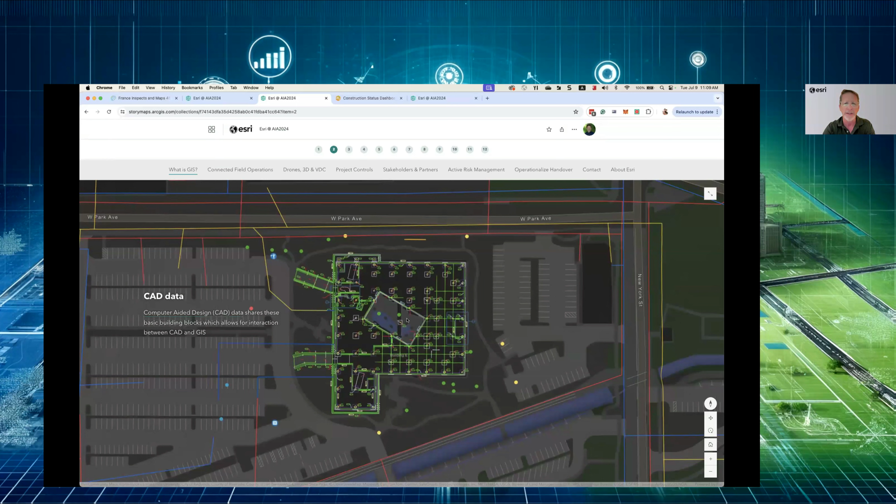This is, I think, where GIS is probably different in a lot of people's minds today than it was even, say, 5 years ago. The intersection of CAD and also BIM data, reality capture information, survey data, all being very easily manipulated and understood in a single environment is bringing GIS into the world of engineering and construction much more so today than it just was a few years ago.

Reality mapping: the idea of understanding your context through satellite imagery, fixed wing, helicopters, drones, even terrestrial scans, and being able to use that data to help provide a deeper set of context over which you might include other layers of imagery, those lines, arcs, and circles and points, or even BIM information.

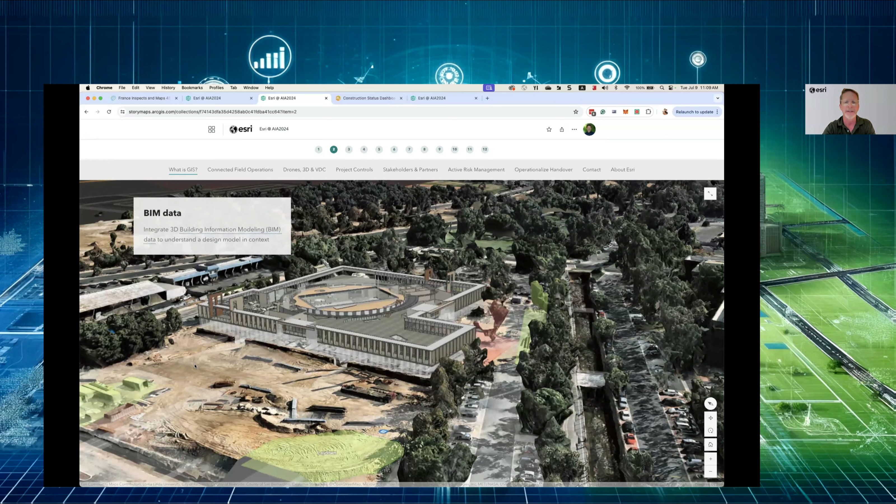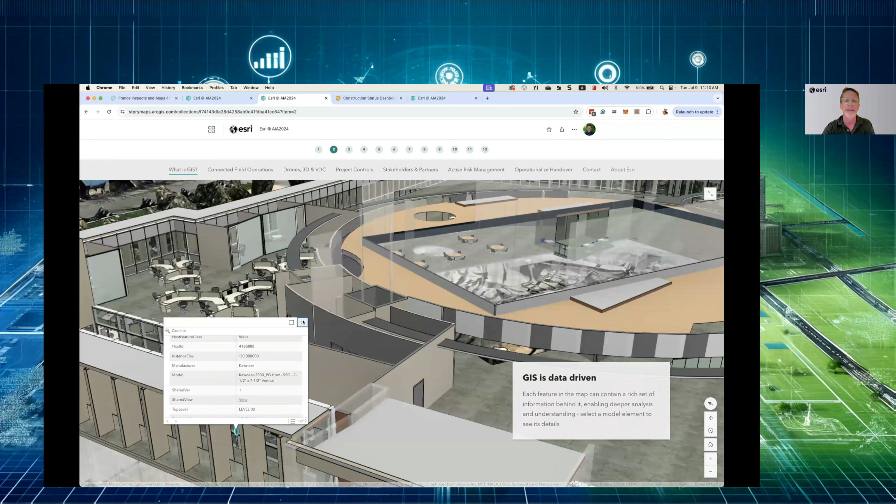In this case, this was a Revit-based model brought into the site, geolocated, and all of these objects that at one point were in a BIM authoring tool, brought into the GIS environment, into ArcGIS Pro, still include all of the properties that you would expect to see in a BIM application. But they're, in this case, available for spatial analysis, for visual analysis, for comparison, for distance, for all types of analytics capabilities that GIS delivers quite uniquely.

Beyond the basics of just bringing together layers of information, GIS is very much a field operations platform as well. And I know we're going to get into more of that through the examples from some of my co-presenters here.

The idea that you would go out with your mobile device, whether it's a laptop computer, an iPad, a phone of various formats, whether it's an Android device or an iOS device, and collect data in the field that represents the conditions of your construction project, the hazards that you have identified, or perhaps asset tracking, asset mapping, or just being able to wayfind yourself to the assets that you have found.

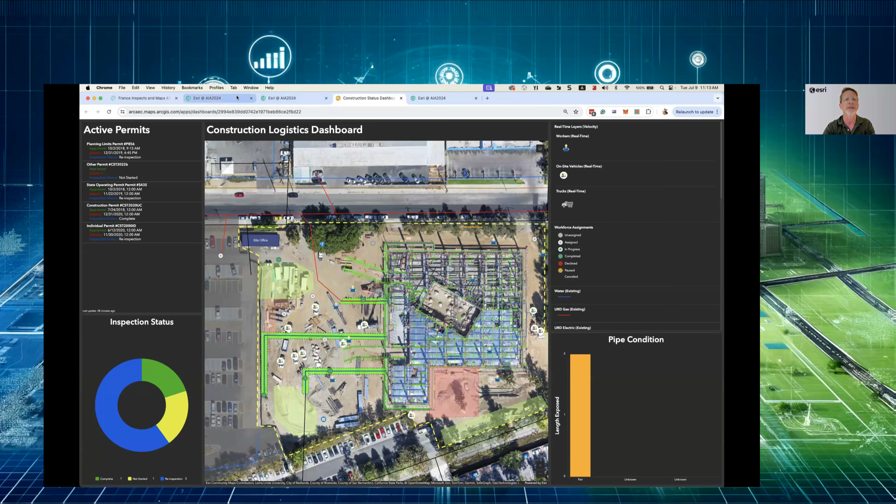As I mentioned, the idea of bringing together your reality mapping, your reality capture information into a singular environment isn't just for visual purposes and isn't just so that context can be understood at a high level. But in the case of our own project, we were doing drone flights on a weekly basis. We now, as the owner of this facility, have access to the historical record. We're able to peel back the layers of the building.

If perhaps we start to see a leak in the northwest corner, we can go back to this digital twin of our construction site, see the data that was collected through drones of any location on that site, and at any particular time, see perhaps flashing that wasn't installed correctly, or a roof penetration that wasn't sealed correctly through the library of images that exist on this particular construction site.

We also have integrations between the location intelligent GIS capabilities, the CAD, BIM, and reality capture information, and schedule data, all in this case combined actually with a game engine to provide a level of visual fidelity, visual quality that really anyone could understand. So sort of gone are the days of needing to be able to understand a stack of 2D drawings and convert the complexity of multiple 2D drawings, but instead having 3D models that are very easily depicted, that are linked back to data, that are linked to schedules in these real-time game environment situations for construction.

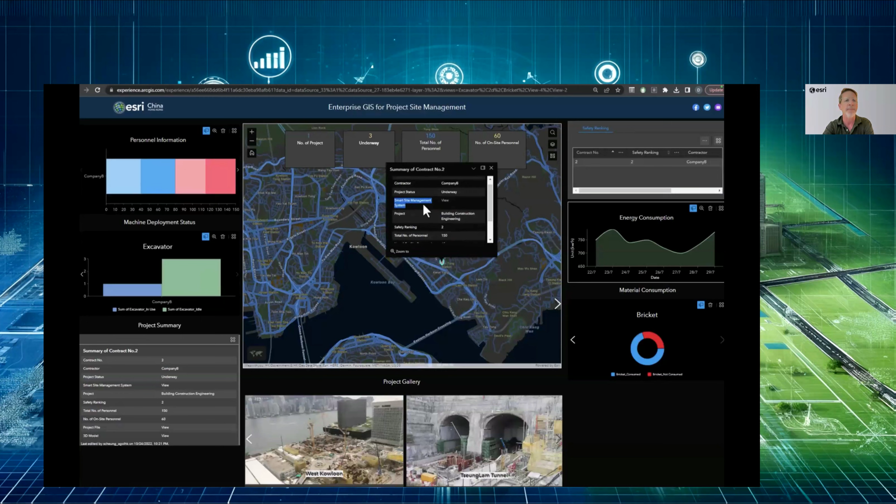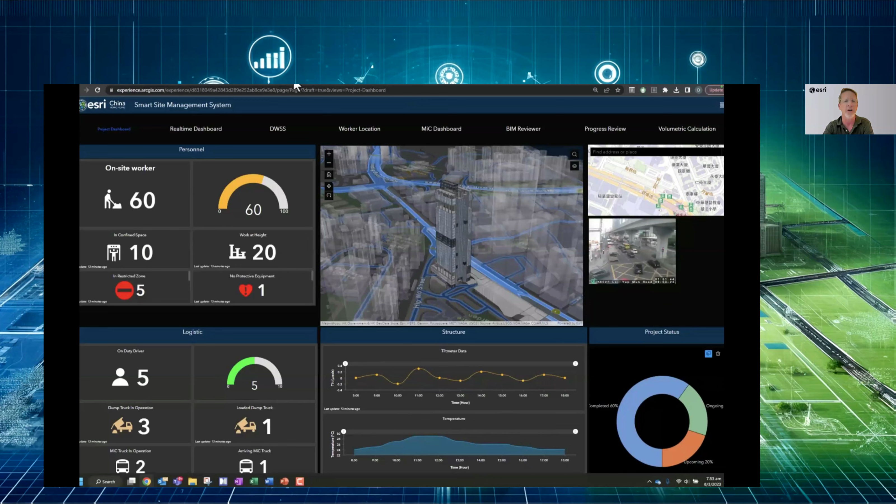Another example that I think is really compelling is from our Esri China office. This is an example in Hong Kong where you can see a combination of map data, personnel information, health and safety information, logistics data, BIM information, camera footage, seismic information, as well as environmental conditions like temperature, air quality, traffic location, all brought together into this construction dashboard.

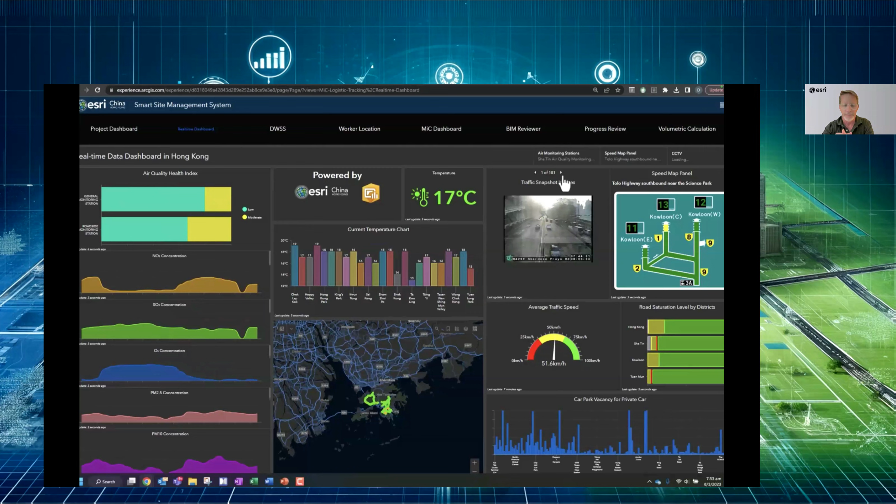And then finally, I think this little example shows how GIS, although many people might think of it as a planning tool early in the AEC workflows, perhaps an engineering application to help understand existing conditions—hopefully I've shown you here its capabilities as a construction solution. But then all of these data sources can easily be packaged up to serve as a digital handover.

Whether you want to call it a digital twin or digital project delivery, these features, this CAD information, these various layers of imagery generated from various heights and at various timeframes all become available to the owner. And I've shown you an example using Esri as the owner, and we're going to see some other great examples coming up.

It's really a complete lifecycle management solution from the earliest stages of planning into design, into construction, over to operations, long-term maintenance, and even the decommissioning of projects—many examples using GIS as a foundation for this entire project lifecycle management. So with that, I might cut myself a little bit short here.

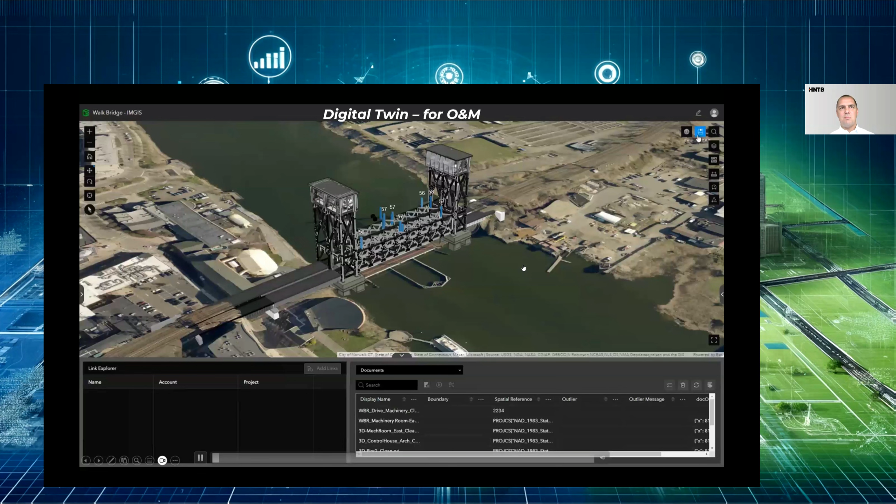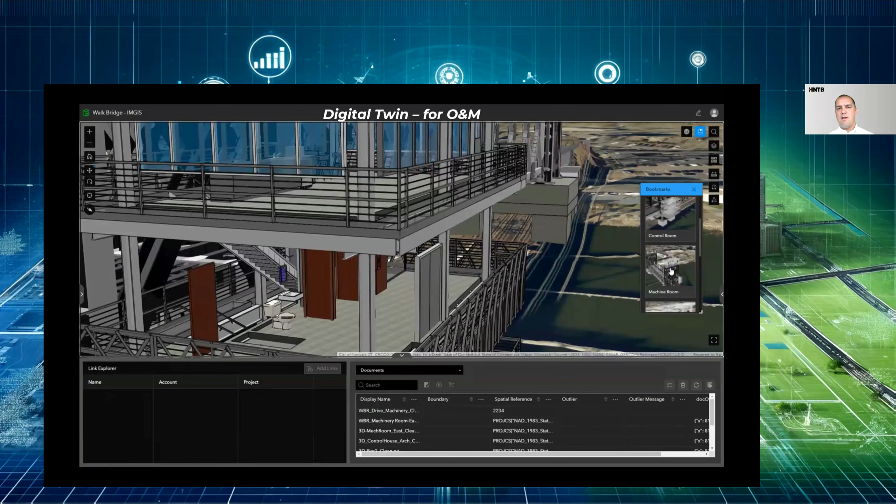Off the top here, I wanted to share with you just a couple of examples of maybe the more exciting 3D type applications of different GIS and 3D CAD BIM things that we've done. This is an example of a 3D modeled bridge. It's actually showing in GeoBIM, like Marc mentioned, and it actually incorporates 3D CAD data from both Bentley as well as AutoCAD sources, gets pulled together into an Esri solution.

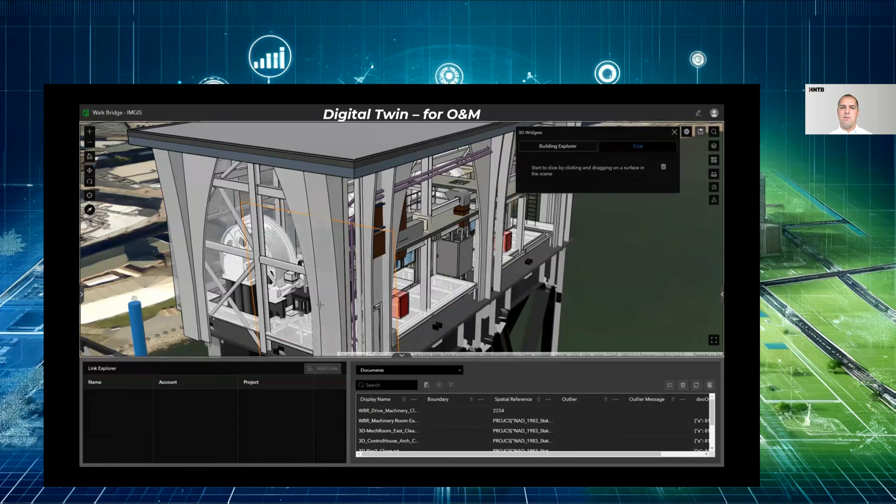It has really helped support the team's monitoring of an existing bridge while another bridge has been built on the side of it. So you can see some of the asset management aspects here of being able to see manuals and cut cross sections into the design. It really brings a lot more visibility into some of the 3D design there. And then the team has also used that to support the construction process. So really it supports a number of different elements there.

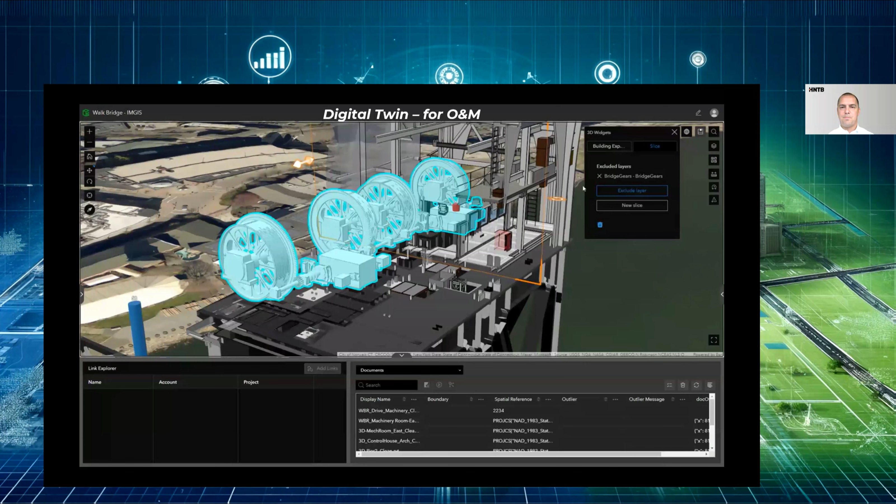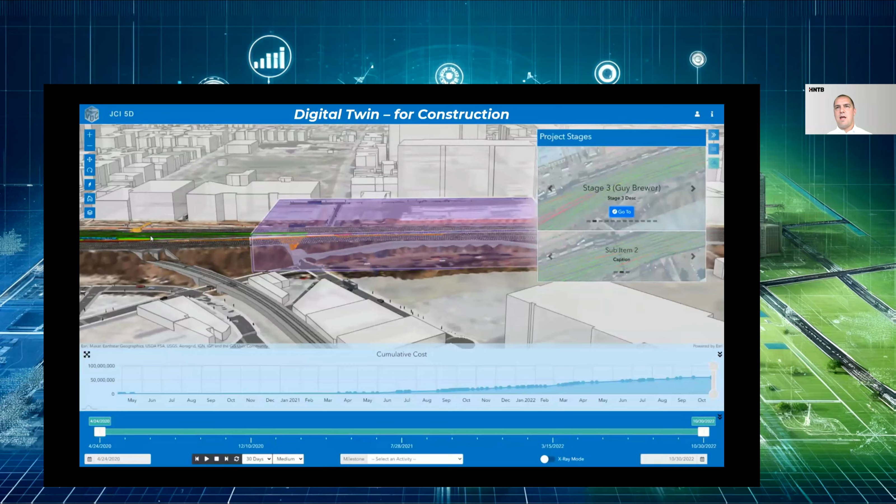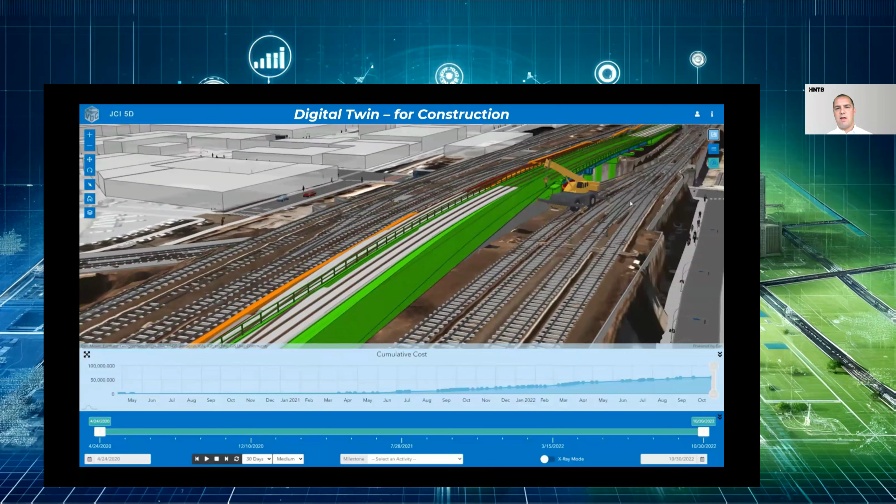Another exciting visualization that our team has used to support different types of transportation work is really to think about construction phasing, right? So this example is showing, actually it's a 5D model. So we've got 3 dimensions, and then we've got cost and schedule as well incorporated into this. And what this really helps us to do is visualize what are the constraints that we might encounter as we go through construction, right? So this schedule aspect allows us to use a time slider and show which aspects of the infrastructure are going to be built at certain time periods.

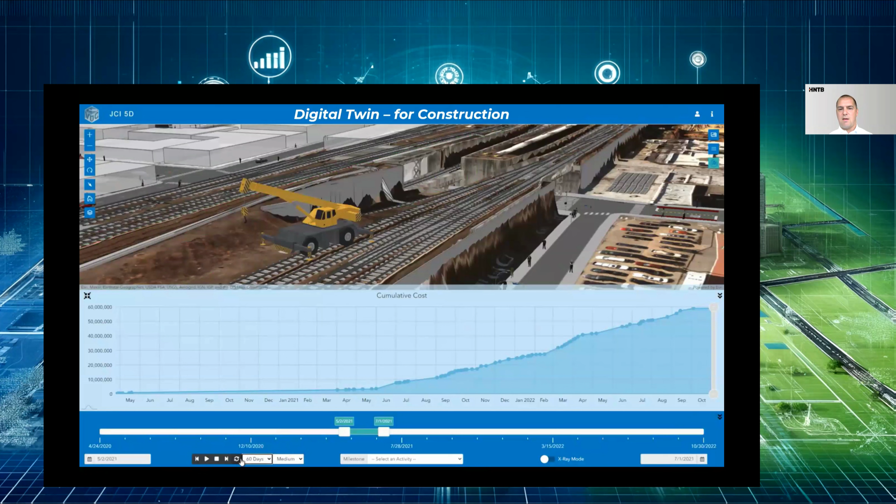And you can also see that cumulative cost curve to help us understand the financial burn and where we should be along the way. So again, this is a really exciting application of GIS and 3D, GIS, BIM, CAD data, all of those things coming together for a really exciting solution.

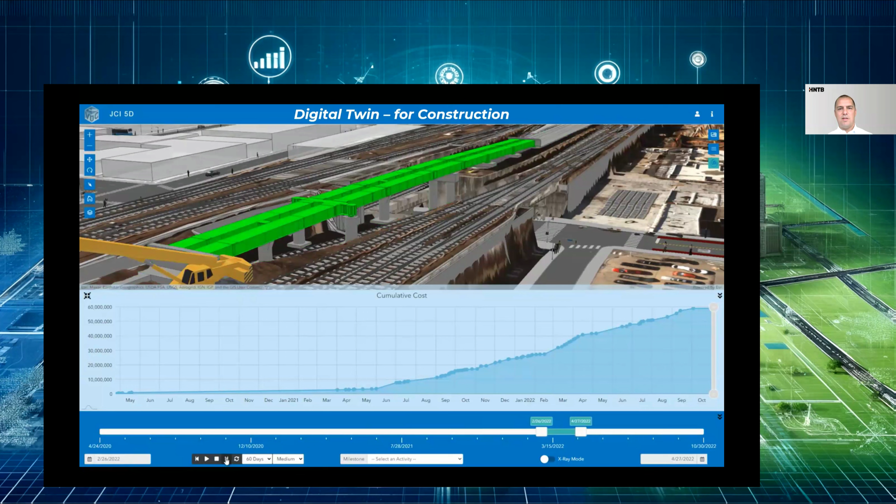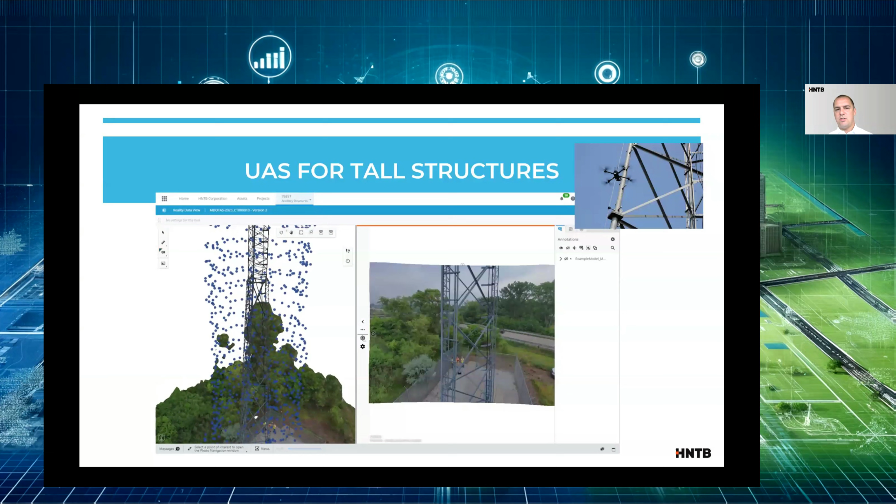And then the next example I'll share is, again, really on the cutting edge of what we're doing here at HNTB using GIS and asset management and infrastructure management. This is an application of using drones or UAV to support the inspection of some very tall structures. In this case, it's a communications tower, and we have an automated Skydio drone that we use to collect the data. You can see the blue dots in the image on the left are the locations where individual JPEG images were taken, and it also shows the 3D mesh model that was rendered after the fact, right?

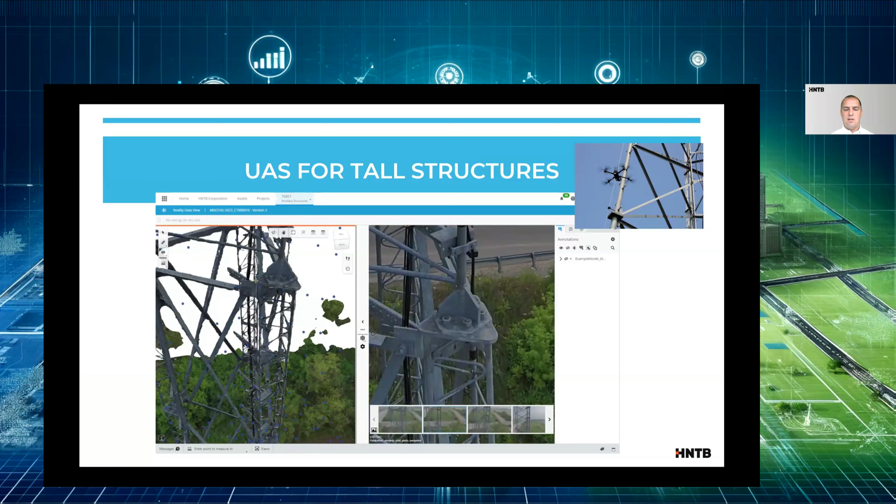So the drone goes around. It collects an immense amount of imagery as well as LiDAR data. And then there's some processing in the background to support a 3D model being created of that asset. And then this viewer allows inspectors to do a visual interactive inspection without climbing the tower, right? So we use this as an early warning or as a way to get that first pass to see if there's any specific areas of concern, and then we follow it up with a tower climber or something like that if there's anything identified of concern.

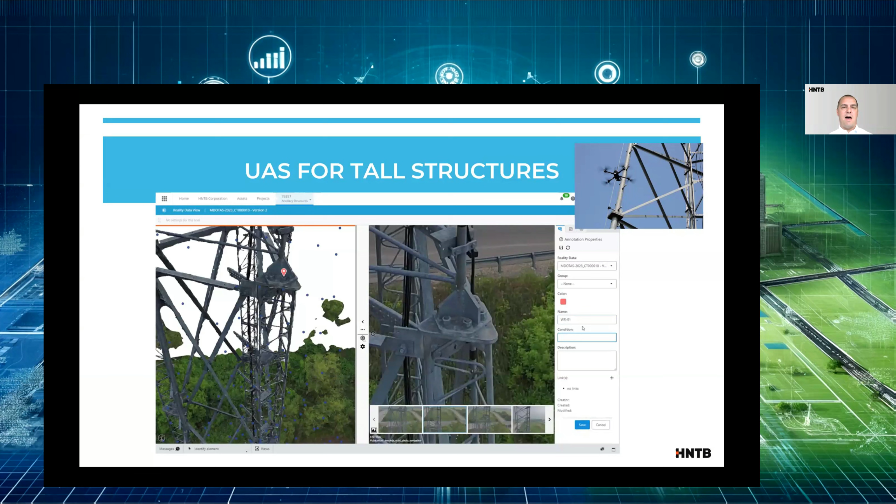So these are some of the really exciting things, really the more flashy things that we can show that we can do and provide a lot of value. And what I really like to focus on the last maybe 10 minutes of my time here is I really want to talk in more practical terms about how we can get started in using GIS as a tool to support asset management of a number of different asset types. So the example that I have here is specifically focused on some ancillary structure assets, but it could be utilized in a number of different transportation assets, such as bridges or other assets.

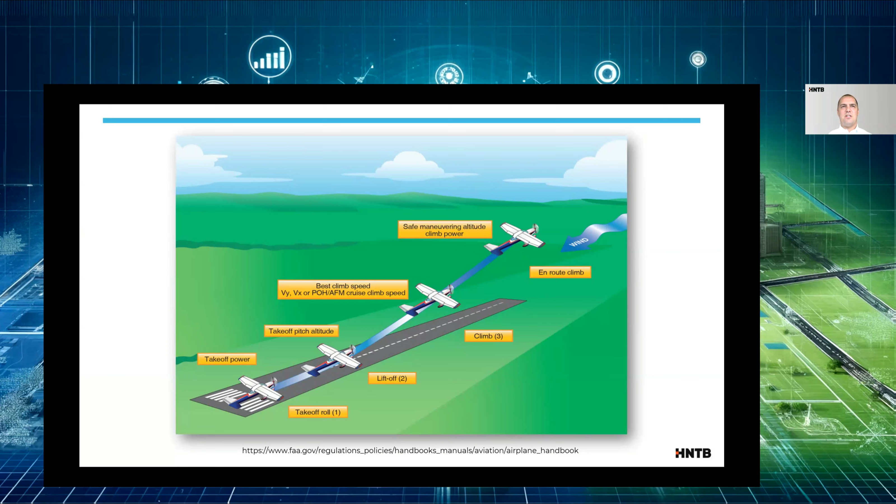So as I mentioned at the beginning of my time here, this presentation is really about getting off the ground, right? Maybe you're just starting your asset management program, and you're thinking about where do you want to go? How do you get started? So I like to use this image example of this plane taking off, right? We know that we want to get up in the air, and we know we have to start on the runway there, right? What's not shown here is all the stuff that happens beforehand, right? So that's some of the things that I'm going to walk through today. Not all of the technology tools, but really how you can get started on building a GIS asset management program. So I'm going to walk through these three different areas of how we got this program started.

Specifically, we first had to plan a route, right? We then had to do that equipment check before we were ready to take off. And then we finally got rolling and kind of had that lift off there.

So looking at this idea of planning the route, the first thing we needed to do was really think about what assets we had, where were they located, and what was the information that we wanted to collect about them. And what we decided to do was a staggered rollout of inspections over the course of a few years of this ancillary structures program in Michigan.

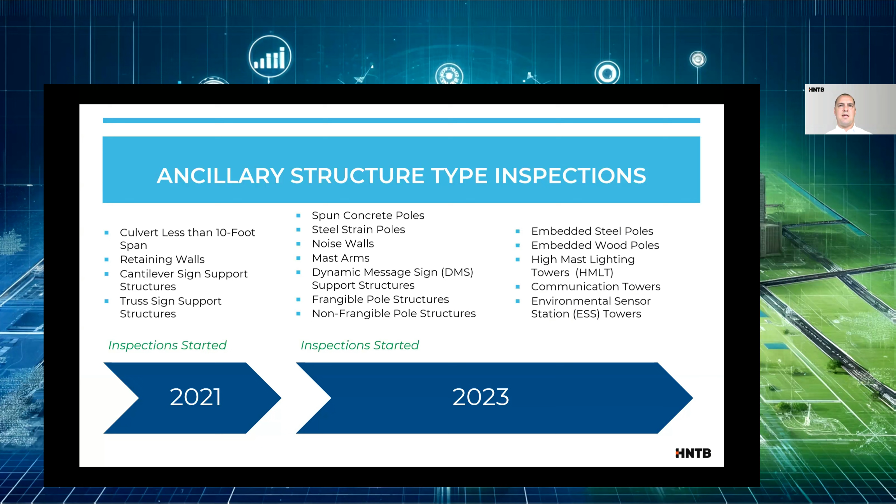So you can see we identified maybe 4 high priority assets that we wanted to start with: the culverts, retaining walls, and the sign support structures. And then we phased in other asset types over the course of a few years.

And again, I know this isn't GIS in particular, but this is really the framework. This is the roadmap that we developed internally as a program that helped us support the decisions we made in standing up a GIS database and getting the inspections in the field.

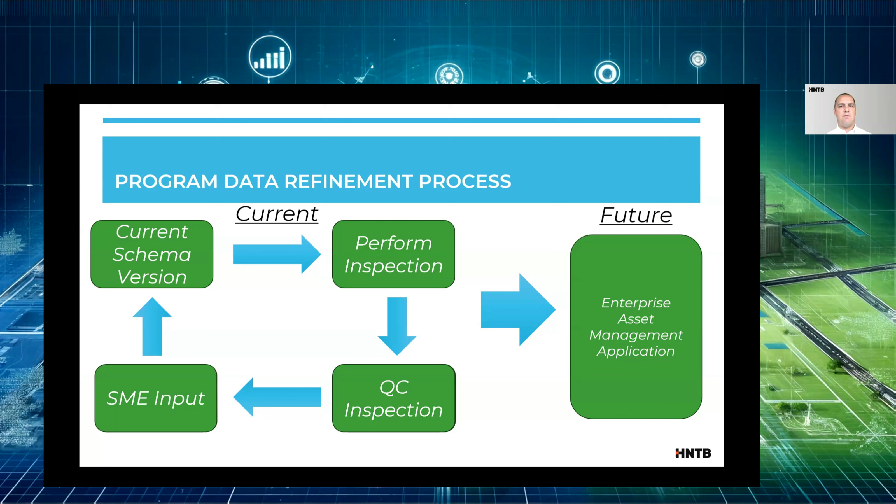One of the important things that we worked on in this program was this flexible framework. We used the Esri database, which gave us a lot of flexibility to develop our own database model and schema. And so through this, we had a lot of iterative changes to the database as we identified what we wanted to collect, and things we thought we wanted to collect that we identified were challenging out in the field. So we went through this refinement process and got feedback from field staff and SMEs. And we know that the client, Michigan, wants to move to an enterprise asset management application and not solely rely on the Esri platform. We know that when we get there, we'll have a really mature data schema.

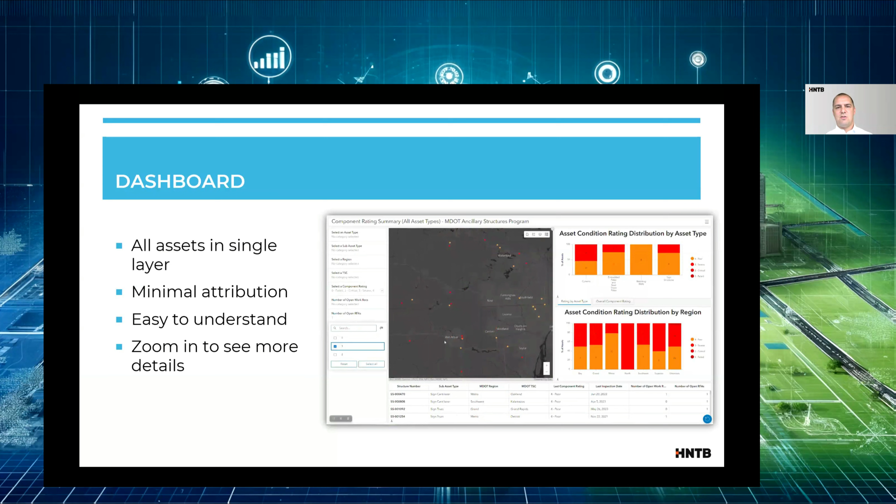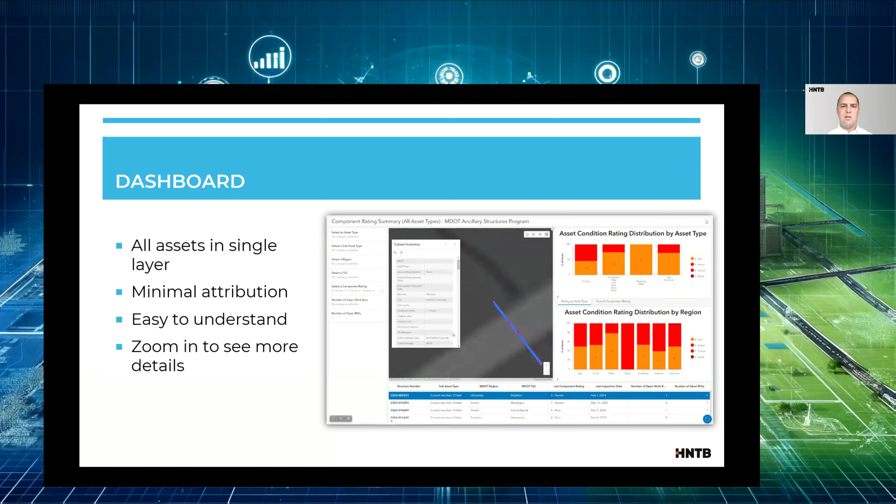I've got just a couple slides here showing some of the different ways that we've been reporting this information out to the different stakeholders. So this is a dashboard that's really more focused on high-level planning or identifying those worst areas of poor conditions, things that can be used to help prioritize maintenance or capital programming. And then we also were able to develop a more in-depth solution that allows teams to really get in and investigate the details of the inspections, including detailed photos and all of the attribution that comes along with it.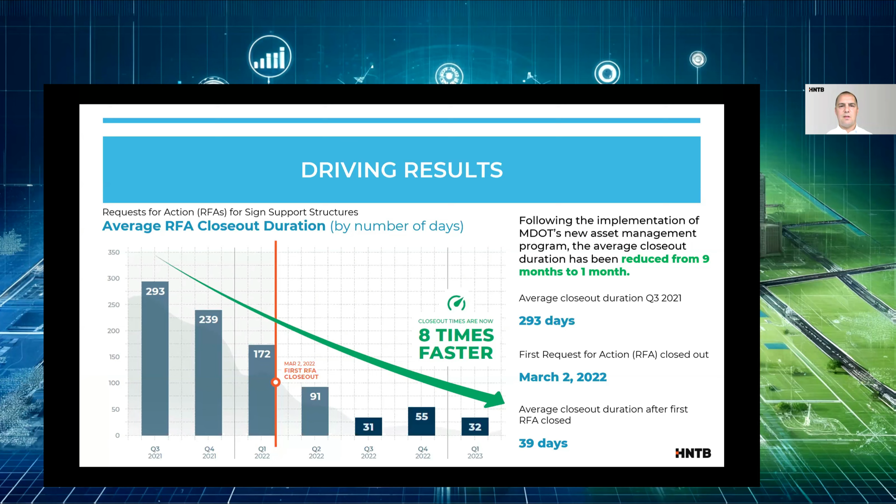All right. And then the last thing I'll share with you as some takeaways here is we were able to get this program going using a COTS, or commercial off-the-shelf, software approach. And here are some of the things that we really found were helpful. This has a familiar approach. We had a lot of people already using some of the Esri apps, so it wasn't a big change for them to jump in and use them for a different asset type. We were able to collect an enormous amount of high quality inspection data without purchasing any new software. We also didn't have any delays due to that procurement or IT process. So we were able to get up and running really, really quickly.

We've maintained full control over the data schema, like what fields we have, and we can change that as needed. We have everything we need, all the apps and things like that. And with that future goal of moving to an enterprise asset management software, we know that we have that mature schema where we're not going to need to make costly updates to a more enterprise customized application.

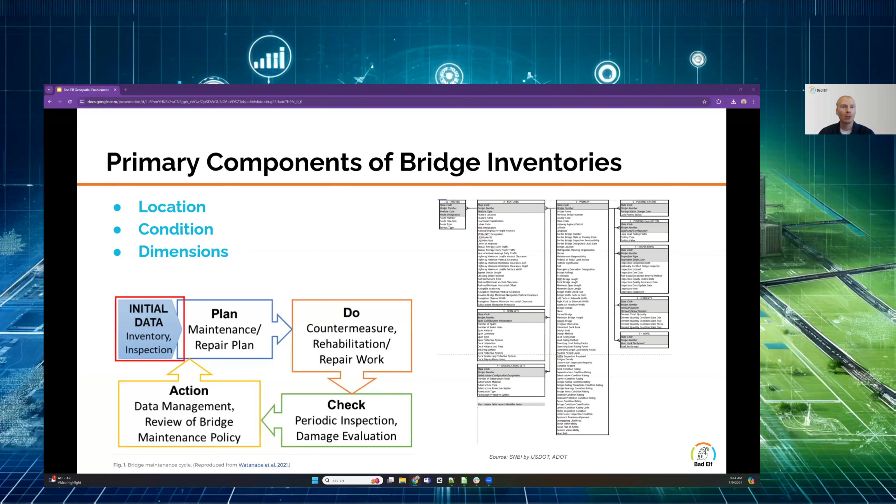All right, so let's go ahead and close that poll and just do a quick review on that, if you wouldn't mind. So it looks like many of you are not implementing a GIS solution for your bridge inspections and maintenance. No surprise here. That's why you're interested in this. So hopefully you learned something today and get inspired to begin that process.

And looks like many of you are actually using a GPS for your data collection. So I'll just cover a quick overview of that, just some of the major considerations when you are starting to integrate GPS into your bridge inspection systems. So the benefits of moving over to digital: data entry is going to be far easier with these digital dynamic forms, especially if you're using an app like ArcGIS Field Maps.

You can do a lot of automation, real-time data checks. You can implement domains and checklists for real-time validation and QA effectively. Out there in the field, you don't have to worry about people making typos, maybe forgetting to fill out a certain aspect of the form. If it's raining, don't have to worry about the paper getting wet, smudged, data entry errors, etc. It just really streamlines the process because you take the whole transfer workflow out of the equation.

You're just implementing straight into the system, and as long as you're connected to the internet, it's syncing straight to the cloud. And actually, in real time, you can have somebody in the office checking and coordinating workflows, making sure everything's looking good, as well as reviewing your own work as soon as you input it. So extremely advantageous, especially when you start implementing GPS and you start having to actually stake out, navigate back to those specific problem areas instead of just having a very generic coordinate of where the bridge is located. You'll have the exact coordinates of those specific locations.

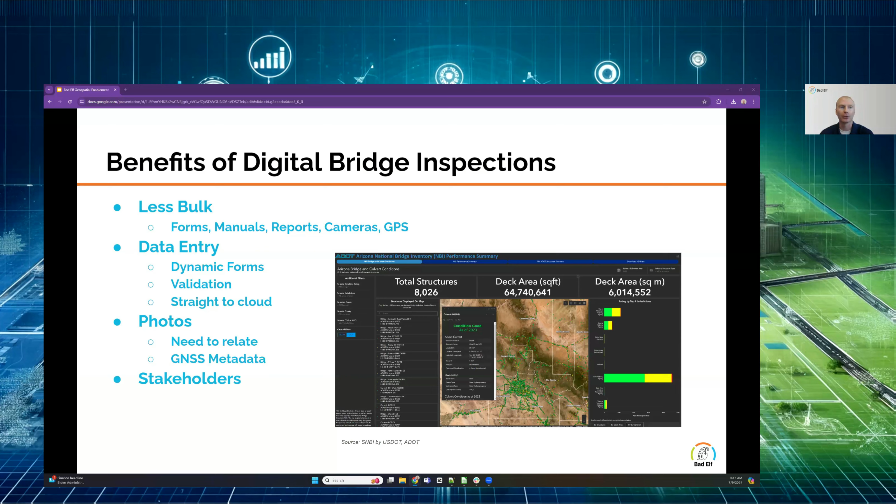So what are the considerations with GPS? GPS has come a long way in the past decade or so. If you're just using your phone or tablet like you would in your car, that's awesome for very general locations. That can definitely help you just track the location of the bridge in general. But when we start wanting to track specific locations of exact defects, we need more accurate solutions. So that's where the very accurate GPS of the modern day come in.

The two major categories would either be survey grade, where you're connected to an RTK system, and you can use these for elevations. Horizontal accuracies are typically 1.5 to 2 times more accurate than vertical. So especially with bridges where orthometric heights are so important, we really want to be as accurate as we can. And you can get 1 centimeter, 2 centimeter accuracy by simply picking up one of these units, connecting to your network, and then connecting to your phone and using an app like Field Maps or whatever your solution of choice is, and start collecting extremely accurate data without being a registered surveyor.

I still recommend only using people that are registered or licensed for whatever application you're doing, but it's more accessible than ever.

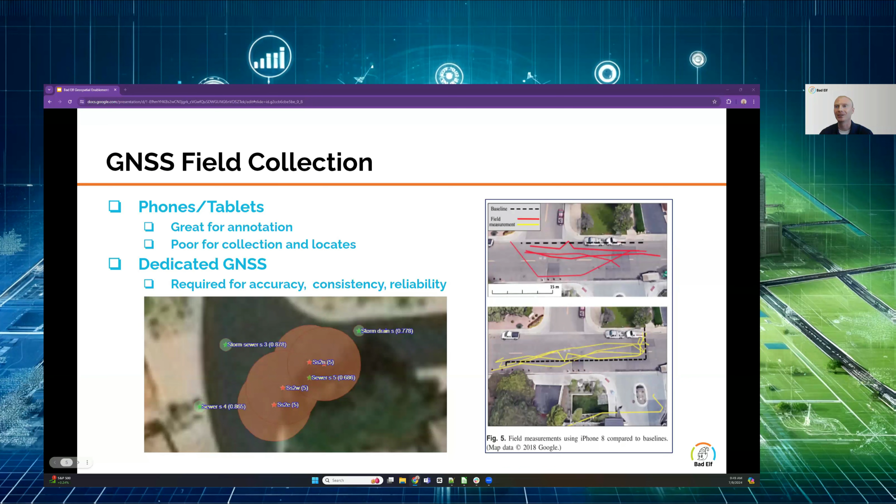When you are collecting data, you will not get as good accuracy directly under a very thick concrete structure like a bridge as you otherwise would in the open area. And we'll cover that really quick in the drone section. So yeah, again, technology advances have come a long way. Vertical accuracy is very achievable now with a very simple setup process. It literally just takes you a minute or two to get going, as long as you're connected to the internet.

And it's actually so accurate, we can measure real-time oscillations and vibrations with the GPS. So we're talking even sub-centimeter accuracy in some cases, and really far beyond where smartphones have been. But giving credit to smartphones, there's actually projects out there using the accelerometer and GPS in consumers, commuters, as drivers, that actually use that to measure oscillations and deformations of the bridge over a time of day with certain traffic. Because we have so many of them, we can average it out and actually use this as part of the analysis too. So the technology available now is really amazing.

We can also use artificial intelligence to go through our photos and automatically identify defects. So lots of options out there to do some really advanced stuff, again, without much training, prep, or investment.

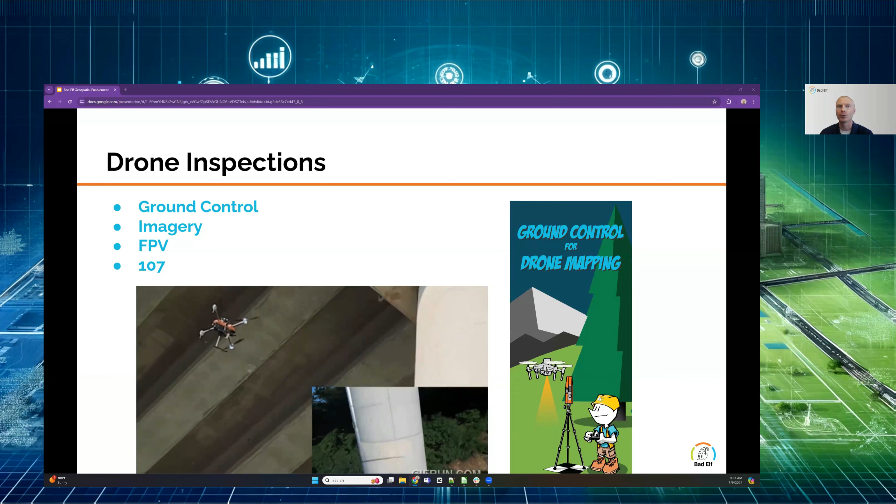And then finally, how do you get started? ArcGIS Solutions is a great place to get started. They have a lot of ready-made templates, plenty of consumer-grade GPSs out there available for purchase, just like the Bad Elf. And there's not a huge barrier of entry at all anymore. With all the fantastic tools and the success story given by Mike, you can see it's easier than ever to start performing these advanced processes. You don't have to be a tech whiz or anything like that. ArcGIS Solutions gives you a standard template with everything you need for compliance. You have full control of everything, and you can easily build off of that template.

Finally, just a quick recap of the two major kinds of receivers. It's going to be the Bad Elf Flex, that's your survey grade kind of receiver. Survey grade receivers will give you accurate elevations, while the GIS or mapping grades of the smaller ones like the Mini can just be held attached to your tablet. It frees up your hand. It's much more straightforward if you're just doing inspections and whatnot and don't need that absolute accuracy, but you can still connect to a network and often get sub-foot accuracy for easy stakeouts and navigation.

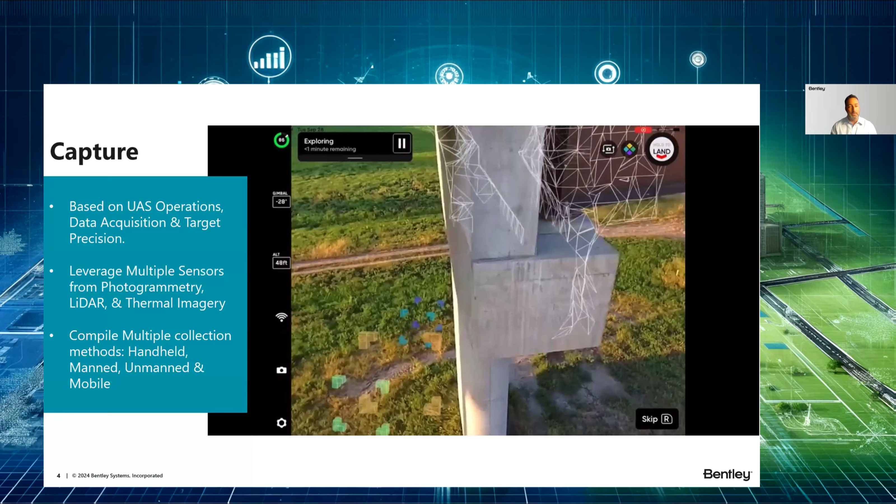And so we talked a lot about drones, and I will say this could involve a UAS crew that goes out. It can involve a survey crew that goes out to set ground control points. And I will say that, in my time working with users, this is probably one of the most important steps. And I mentioned that I was going to discuss the friction points.

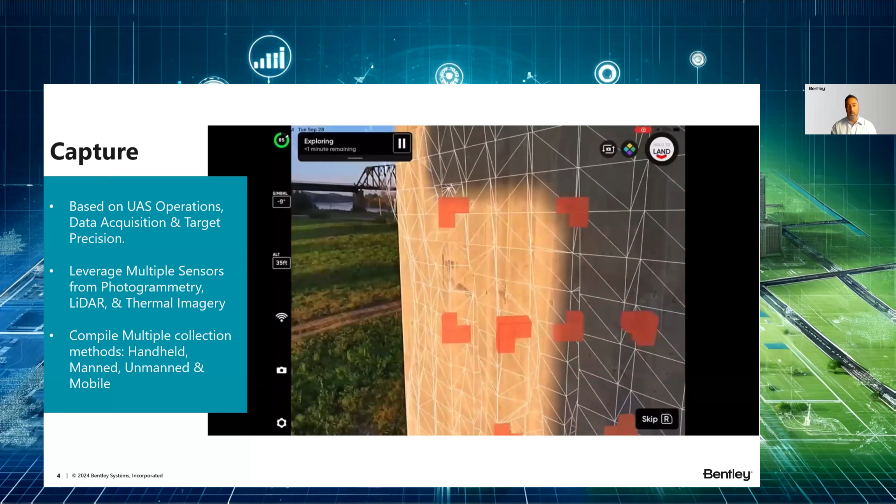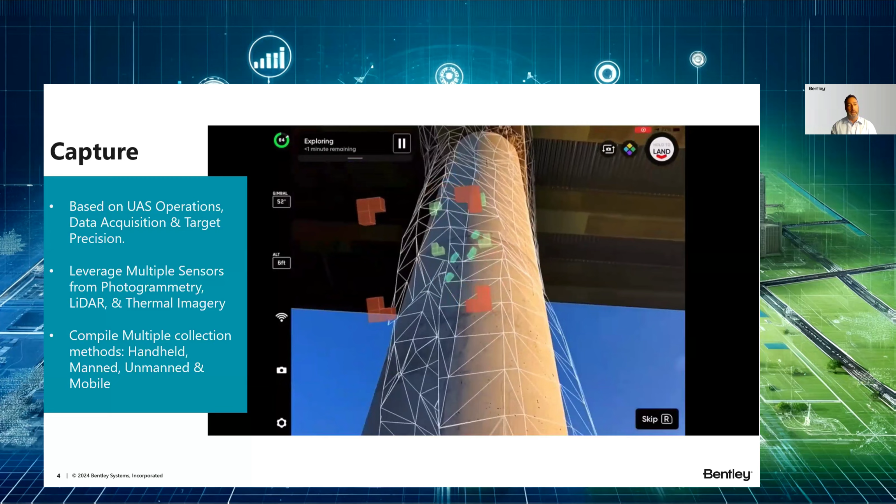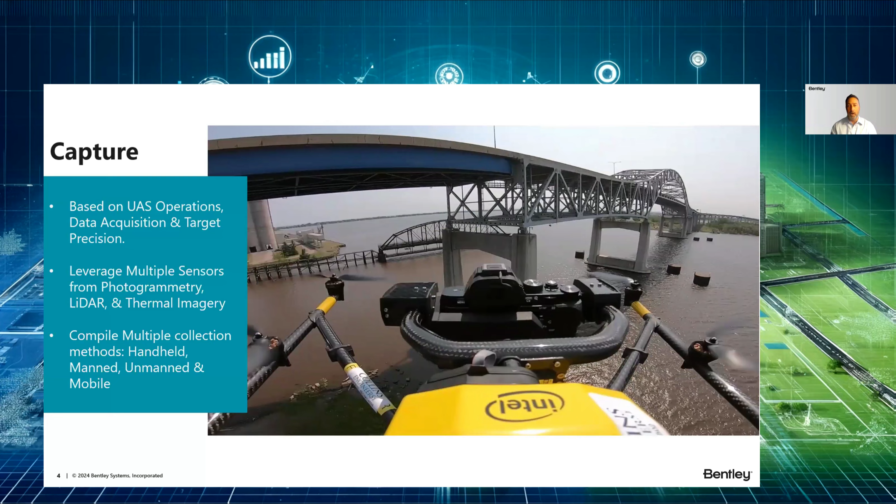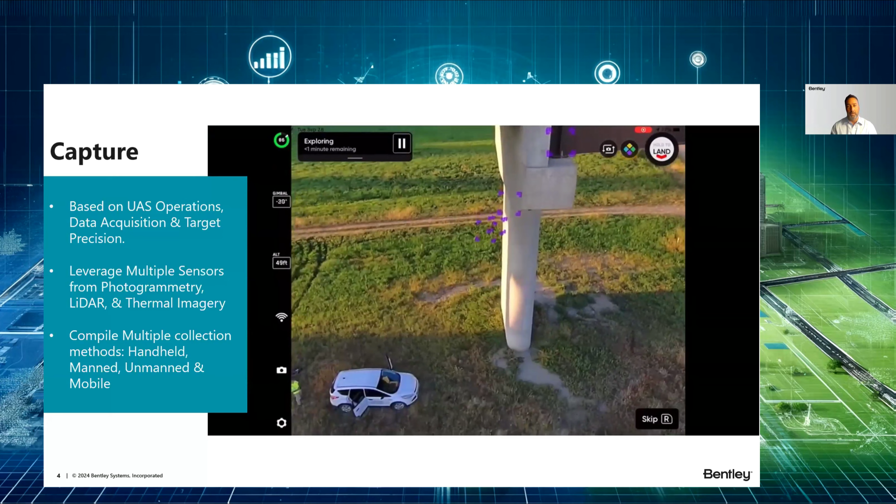This can be one of the hangups, and it's really imperative to put the time in to create a quality model, because if you don't create a quality model and it comes out looking like melted ice cream, then no one's going to have confidence that they can really sit behind a monitor and get a good feel for the as-is state of the bridge. So I'm optimistic about that. I think the drone manufacturers are doing some work with AI, and they're improving the acquisition methods so that it's easier for those drone crews to really get quality models.

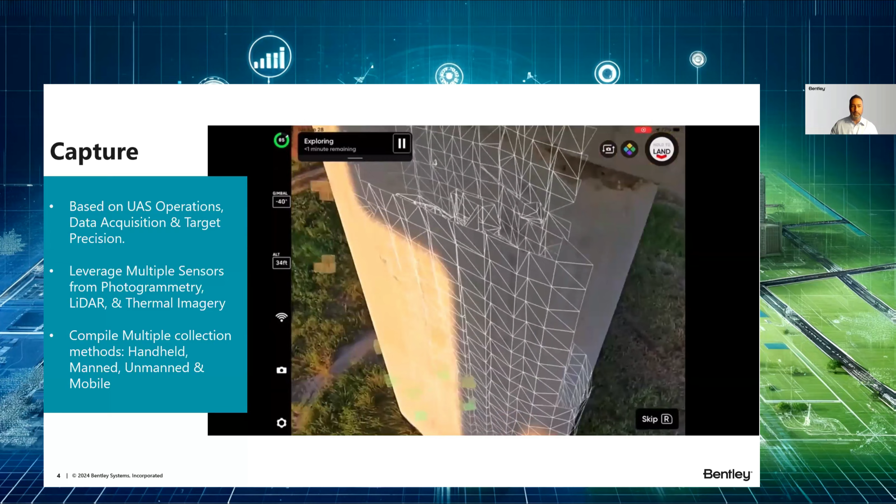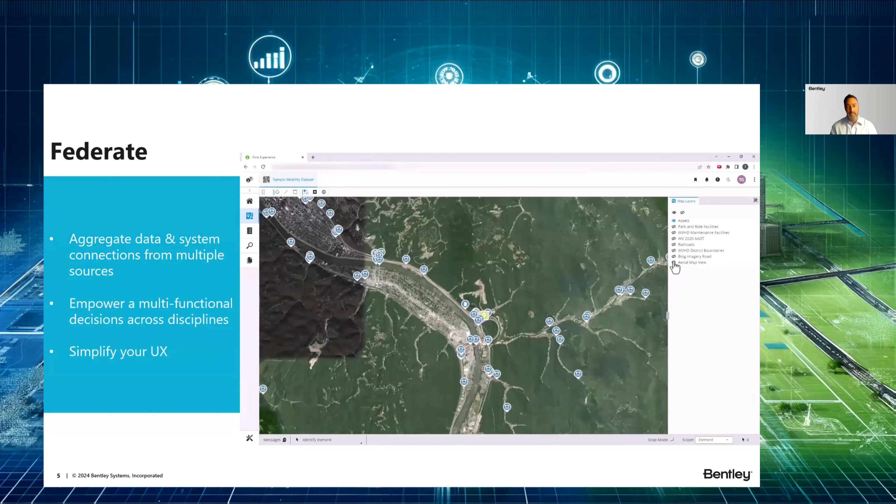So once we get all that quality data, we can take it back to the office and we can build that photorealistic model. You can integrate it into a map view. So, certainly maybe you're managing a network of bridges, but not every bridge is going to need a photorealistic model, but it's a bridge that still has an inspection history. It's got data associated with it, and you want to be able to manage it. Like I said, in that single pane of glass, you can do that.

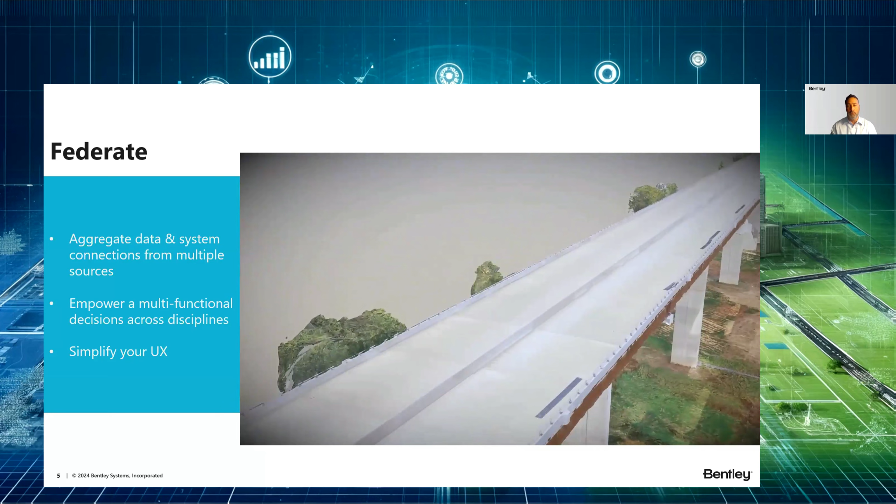And then for your larger signature bridges, you can send the drone crews out, create a model, and layer in all that additional data. You can even layer in BIM models. I know Marc talked about that.

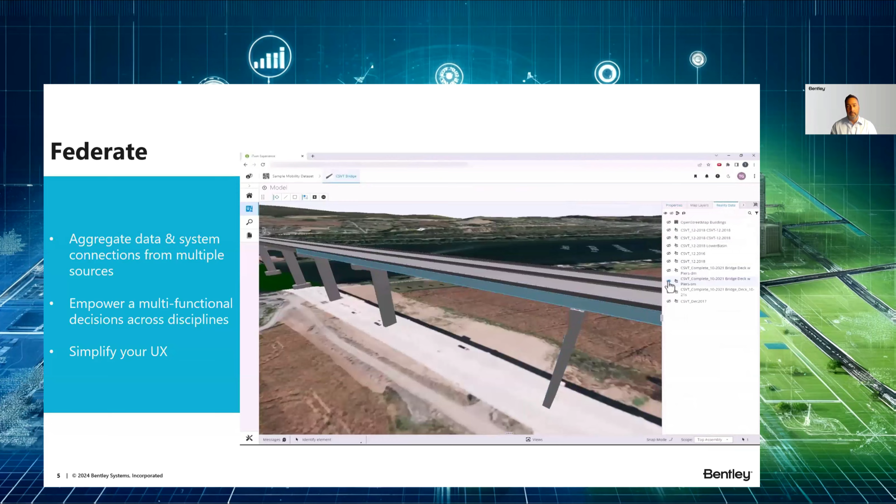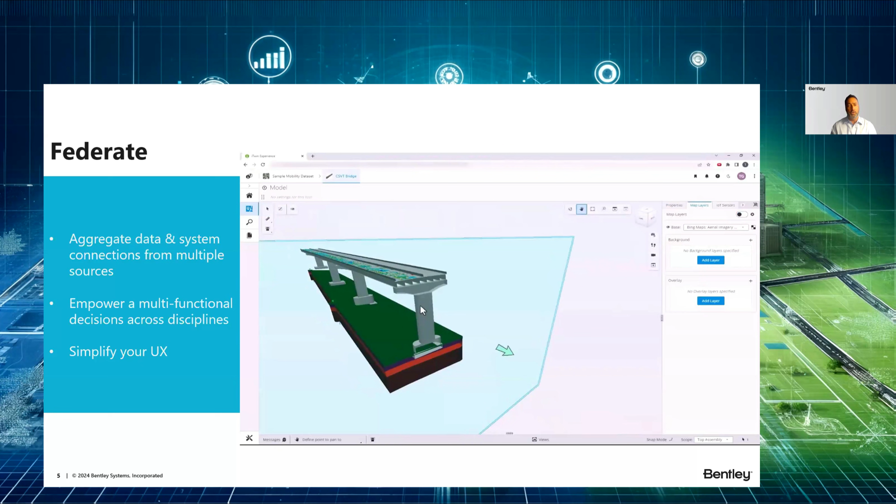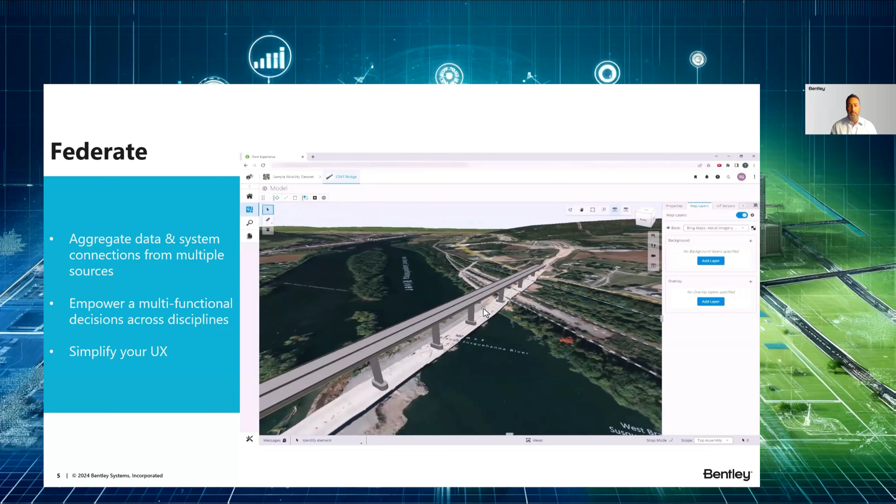One of the advantages here is you're bringing in a BIM model with all the properties. Maybe that's not necessary for a bridge inspection, but it could be applicable in other areas where individuals want to access data in a BIM model but don't have familiarity navigating a design authoring program like AutoCAD or MicroStation. They can access it through the web, layered in with all the reality data and other data associated with that particular bridge. The theme here is bringing everything into one location and making it easily accessible to all project stakeholders.

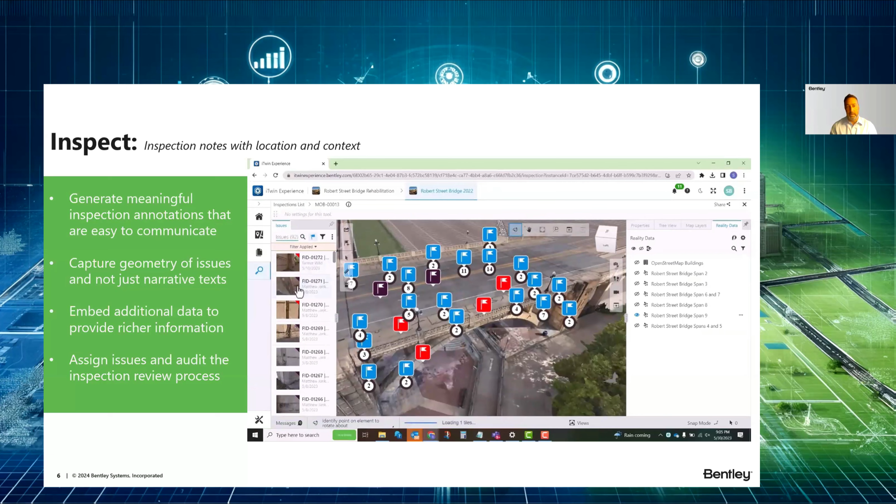Once you've got the model built and everything pulled in, that's when you can do the inspection, a remote inspection where you can zoom through the bridge, fly through it, click on areas of interest, and create an issue.

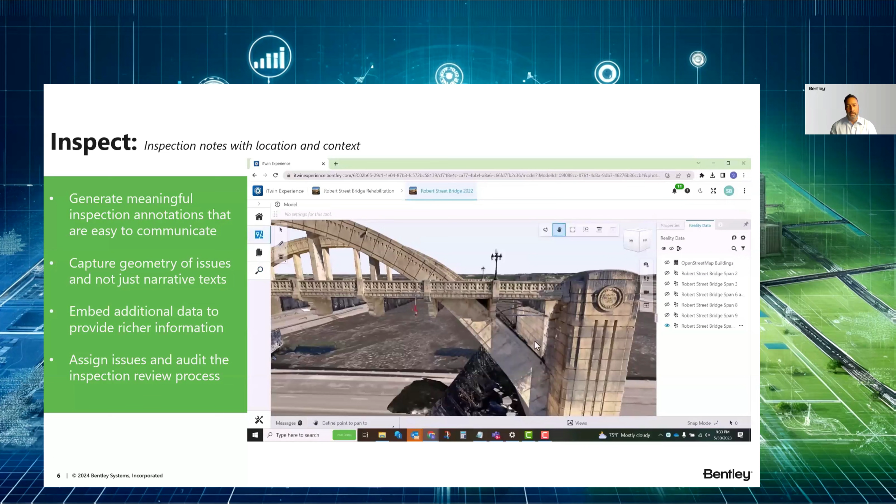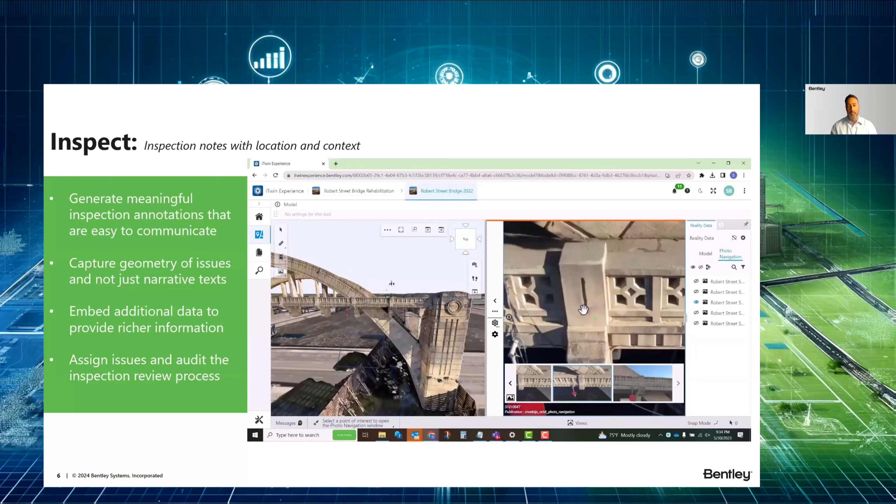You can use the photo navigation feature. Previously you may have opened up a folder and scrolled through photos of a bridge taken by a drone, but you didn't have the context and that side-by-side view of where a photo is located.

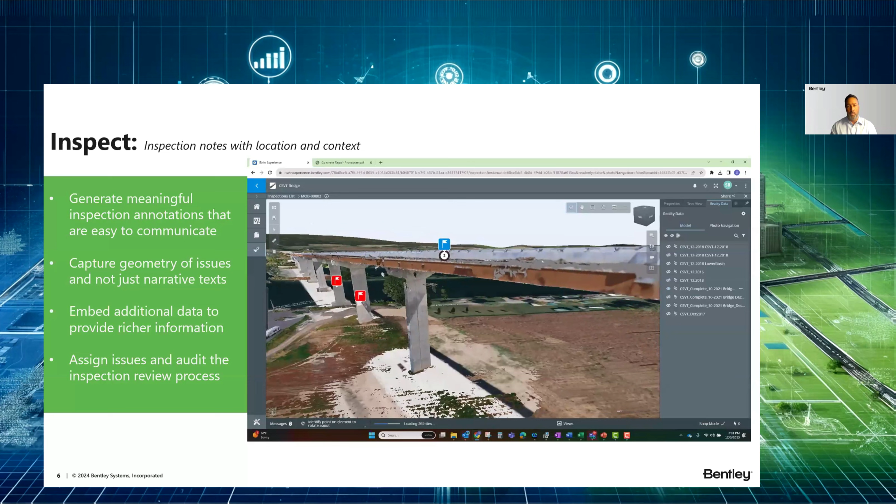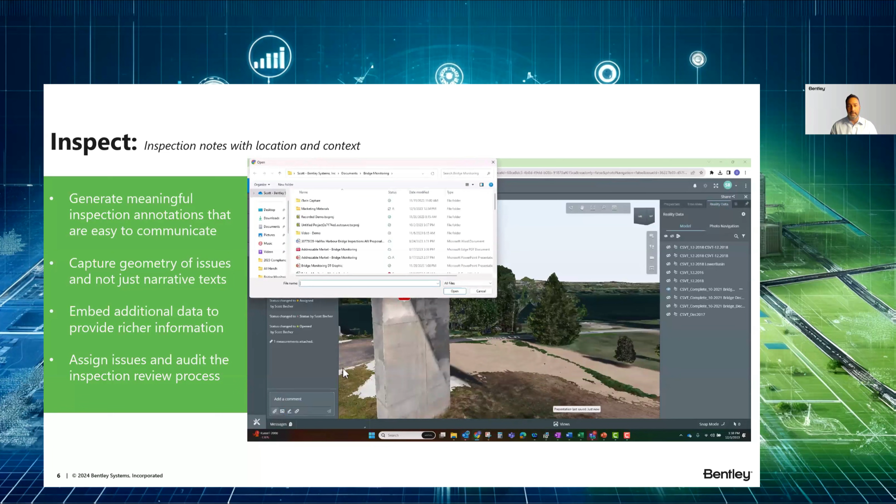I want to be clear that we're not suggesting remote inspection eliminates the need for an on-site inspection. A lot of the users we're working with have implemented this tool as a pre-inspection tool. So they send out their drone crews, create the model in the office, and give it to a set of engineers or inspectors who may be less experienced. They can take a first pass at it and identify critical areas, critical spalls or cracks. That way, when the senior inspectors do go out in the field, they can better plan their inspection and make better use of the equipment on site, reducing lane closures and the impact on motorists.

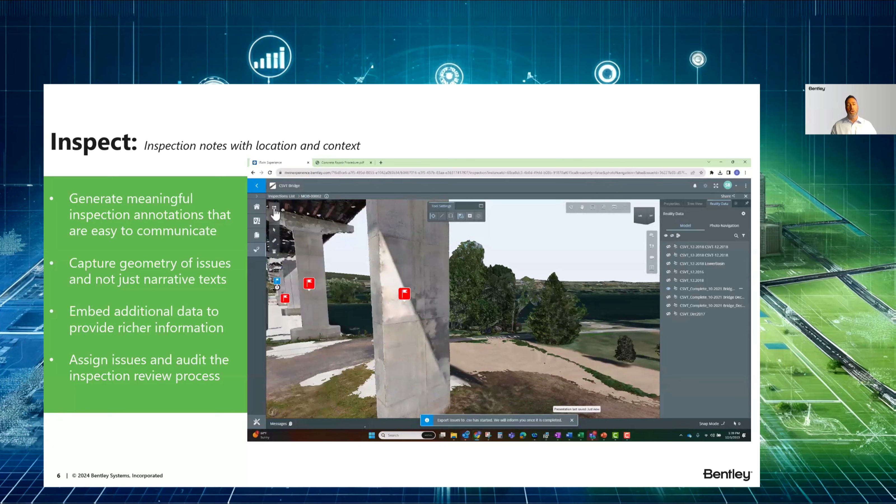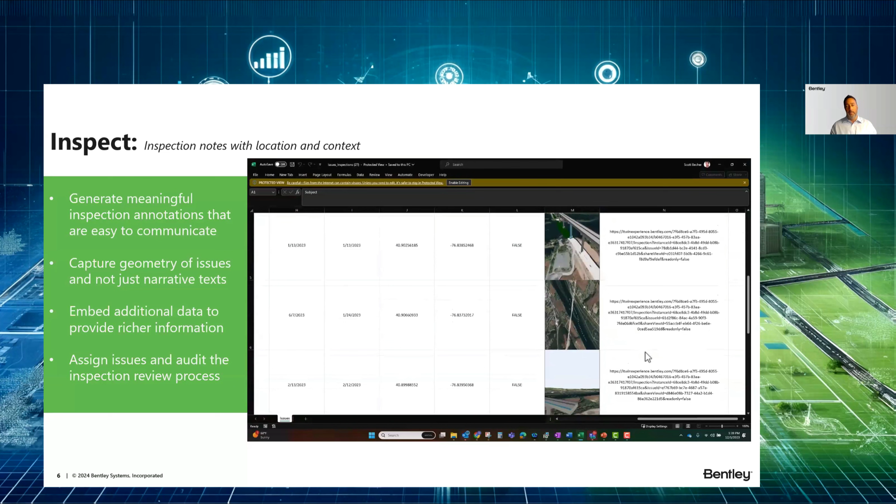Additionally, when the senior inspectors go out, they can have that model on a tablet. They can go to each one of these defects, amend it, take photos, delete it, or make new issues. It's really about shifting those high risk, expensive inspection hours in the field to the lower risk, less expensive hours in the office.

There were also a couple of capabilities where you can attach PDF files of design rehab recommendations, and you can export the information with geo-referenced issues, making it easily accessible to all parties involved.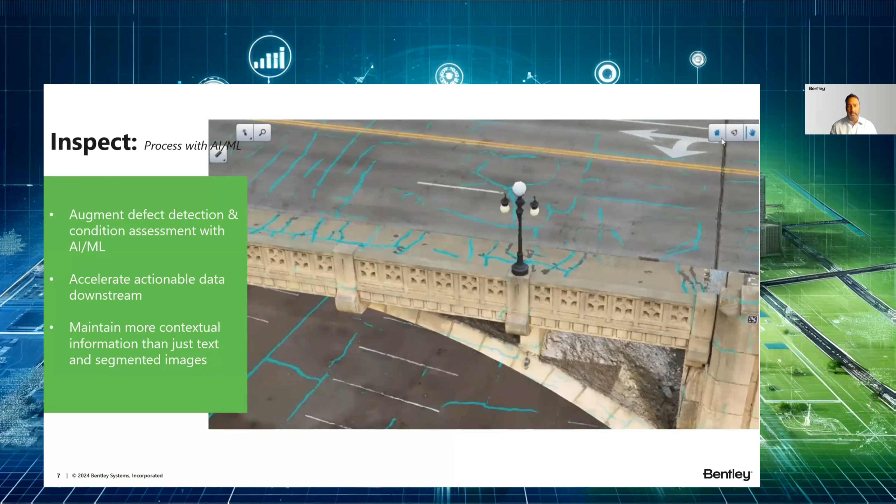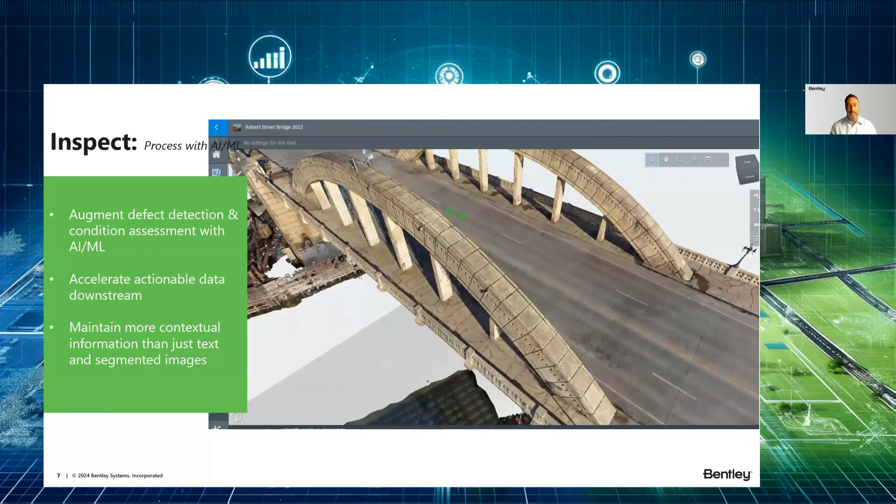I also mentioned consistency and accuracy, not to say anything about inspectors not producing accurate data, but imagine an inspector out inspecting an irregularly shaped concrete spall in extreme heat, dodging cars, using a tape measure. Compare that to a computer identifying those spalls by looking at the pixels and identifying that area. You can see how this provides a more accurate accounting of the defects and a baseline for starting an inspection.

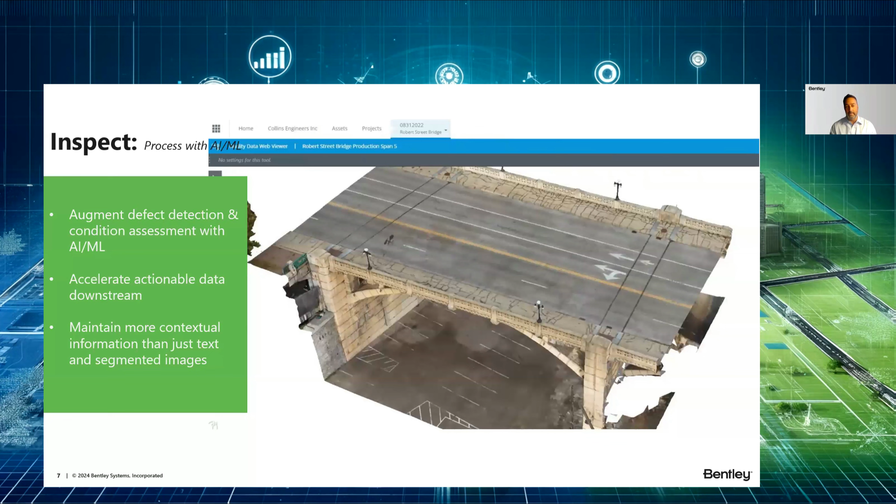Like I said, the senior inspectors can pre-plan those inspections when they do have to go out in the field.

I'll wrap this up by sharing a case study. This was in St. Paul, Minnesota, the Robert Street Bridge, with Minnesota DOT. We worked with a couple of consultants who performed this inspection, and using these tools, they saved over 30% in inspection hours and fees. You can imagine the impact on the dollars spent and on traffic, since they're not spending money to close lanes or causing disruptions. It was a win for everyone.

The feedback we got from the owner was that this was a projection they expected, and they anticipated seeing a minimum of 20% construction savings.

So this inspection was done as part of an identification of defects for rehab and maintenance items. And what they said was that previously they would be working with a lot less information, and so they were sort of forced to make overly conservative decisions.

So for example, there may be a delamination area, but they didn't know how big it was. And so when they go to a contractor for repairs, they make an estimate and it's always going to be overly conservative. But this tool with the additional information gave them the confidence to really hone in on exactly what repairs were needed and better allocate those resources.